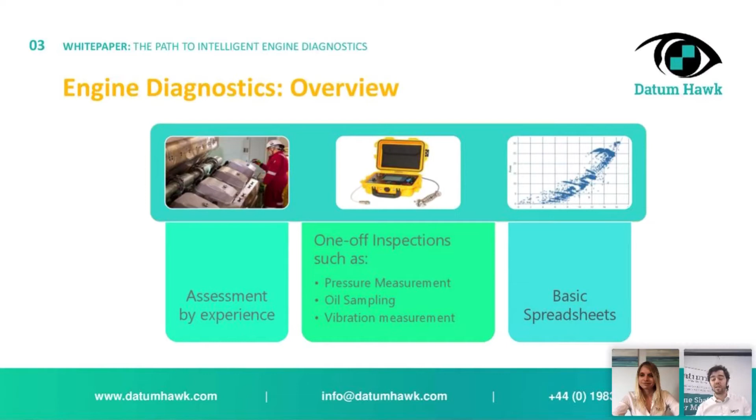And what we're looking to see here is how we can make a contribution in Datum Electronics, such that we can lessen and improve the burden that the ship owner is having on their shoulders, so they don't have to automate their decision-making procedures in terms of maintenance and diagnostics, as well as not having to worry about these things directly themselves, by bringing state-of-the-art technologies, as we're about to explain.

So, as I already started to explain, what's the need to innovate? Well, we want to first of all help implement the state-of-the-art of monitoring and diagnostics technology. And with the onset of digitalization these days, it's almost a requisite that everybody should be involved with these kinds of things, because there are massive benefits to gain.

Also, we are facing extremely volatile global markets with global fuel market uncertainty, as well as massively fluctuating profit margins, which is actually not only a recent problem, but tends to be recurrent, especially in the shipping industry. We tend to have a lot of booms and busts.

In addition, we are facing quite large costs as well. The increasing machinery complexity increases maintenance costs, and also there is costly downtime. As a matter of fact, I remember seeing a report from the Swedish P&I Club, which claims that the claims for machinery breakdown are steadily increasing over the last decade.

The last, and also a very important topic, we have to deal with compliance. So IMO has a new regulatory agenda with things such as the EEXI, which might be implemented. We have the EU Green Deal and the UK Clean Maritime Plan, and all of these will push the ship owner to run very, very efficient engines, and respectively might reduce the profit margins. So cost savings are even more essential.

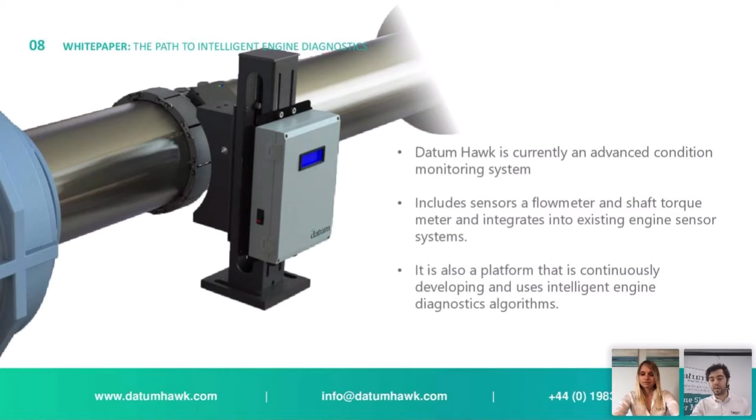But most importantly, Datum Hawk is a platform that is continuously developing and uses intelligent engine diagnostics algorithms. So we obtain data, we process them, we develop algorithms to explain the phenomena that we see and that can improve the operation of the engine, and we feed it back into the system. So that's the idea behind it.

So how does it work? In order to address this, we have to address it through a three-step process. First, we have to understand what the vital measurements are, which we're looking to collect. And in these vital measurements, of course, is the instantaneous crankshaft torque, or otherwise the engine's torque profile.

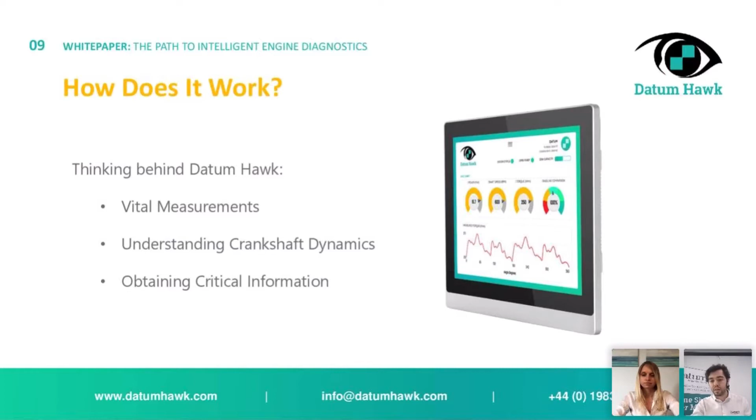Then we have to discuss how we can understand this measurement and how we can interpret the data provided by this measurement. And thirdly, we have to see how from this interpretation we can actually obtain useful information about our engine. It's going to help us. So, the vital measurements.

So as we said in the beginning, engine monitoring can be done in many ways. Primarily, we measure engine temperatures, fuel consumption, we do oil sampling, and we measure the in-cylinder pressures.

However, we have to keep in mind, when we're measuring something, it has to fulfill 4 criteria. The first one is, whatever is being measured has to be measured accurately, so we have high confidence that the value we're recording is accurate.

Secondly, it has to be measured cheaply. For example, it would be great if we had an airflow sensor in the engine after the turbocharger, so we can see what the mass airflow is, but this would be absurdly expensive.

Thirdly, this measurement has to be performed continuously. This is a very important point we're stressing throughout this presentation - for these techniques to be effective, there needs to be continuous monitoring so we can detect the onset of faults and diagnose beforehand, before they blow out of proportion and increase the cost of operation with costly downtime, etc.

And last, these measurements should be able to provide useful information about the engine. Certainly, the more we can measure, the better, but we have to narrow it down to key measurements. For example, the scavenge pressure is an extremely useful measurement, but it doesn't tell us as much as the in-cylinder pressure. So there's certainly a way to categorize things.

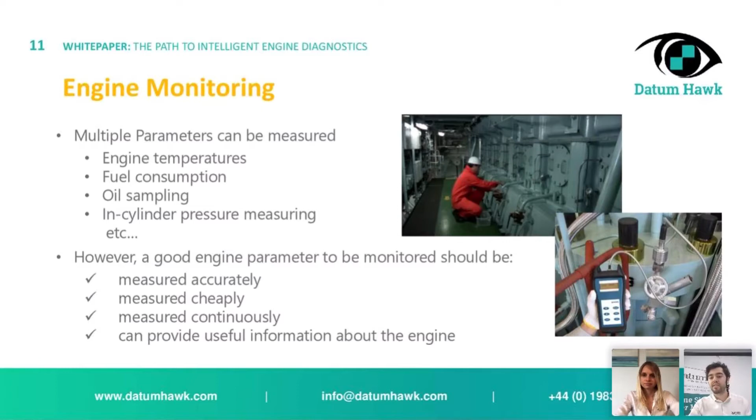For example, a condition where we have a fouled injector, or some detuned or differently tuned timing with advanced injection timing, which the engine might get if it logs more operational hours. We have a lot of experience, not just us at Datum Hawk, but also the ship owner, in interpreting in-cylinder pressure diagrams.

That's why it's so important. It can reveal differences such as differences in fuel quality, injector condition, engine tuning and degradation, as well as blow-by. These are very important things we can know about our engine.

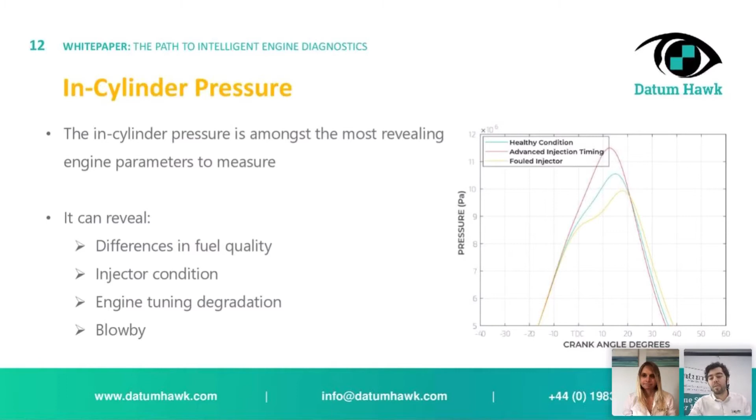However, it's very hard to perform continuous in-cylinder pressure measurements, not only because we have to deploy a network of sensors to all cylinders that have to be synchronized, but because it's a very expensive thing to do.

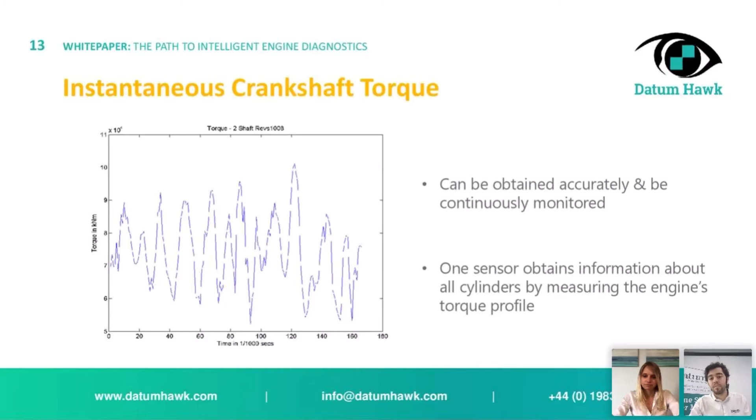But certainly, one of the very important things about the instantaneous crankshaft torque is that it can be obtained accurately, extremely accurately in our case, and be continuously monitored. Also, one sensor obtains information about all the cylinders by measuring the engine's torque profile.

So let's see how we can understand the crankshaft dynamics so we can establish a relationship between the in-cylinder pressure and the torque that we're actually measuring.

So the way to do this is to develop a crankshaft dynamics model. To interpret the information in the instantaneous crankshaft torque, its relationship with the in-cylinder pressure should be determined. For that, we need to examine the engine torque and how it's being transferred to the engine's load.

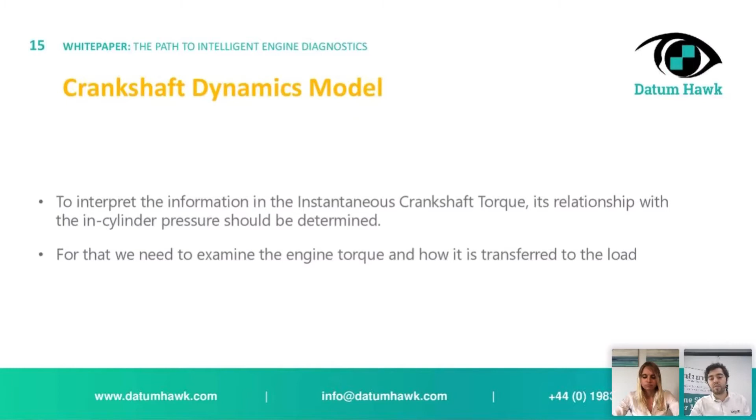So there are a few mechanisms for this happening. First of all, we have combustion torque from the combustion gases within each cylinder. Then we have torque opposing the combustion torque, which includes the friction torque on the cylinder liner, as well as all the main bearings.

Then, and most importantly, something that's not intuitive, we have crankshaft structural damping as well as flexibility torque. So we have a lot of absorption from the structural flexibility and the structural damping, as well as the crankshaft flexibility. As it flexes within all of these loads exerted on it, it actually translates the torque signal. And last, we have the engine load torque, which is what our propeller would absorb, or the generator.

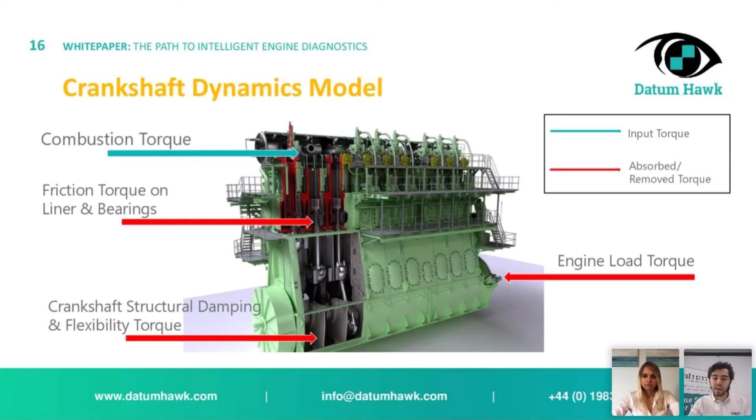So if we put all of these together and create a crankshaft dynamics model, this is what we've actually done over the past year. We've put together a crankshaft dynamics model that takes very basic inputs, for example the in-cylinder pressure for every cylinder, the basic information regarding the engine, like number of cylinders and the stroke, as well as torsional vibration analysis coefficients.

The torsional vibration analysis is a piece of paper that we get after the installation of the engine, when it's brand new on the vessel, certifying that there are no hazardous vibrations. The information contained within there is used in the crankshaft dynamics model, and this comes with all engines. With that, we're able to model and predict what the engine's torque profile will be.

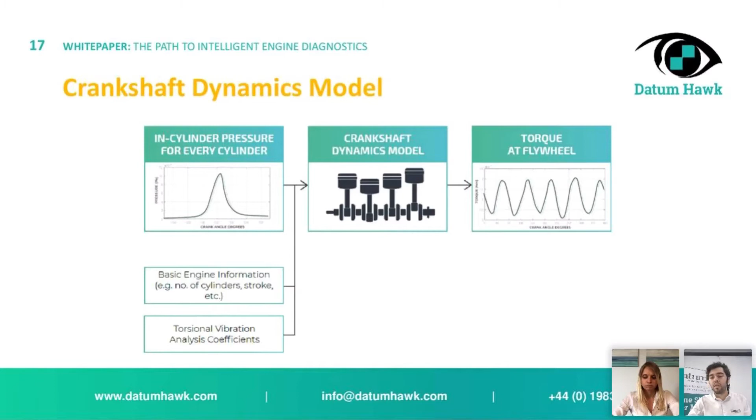So how is this actually useful? Well, first of all, we have to validate the model, and actually that's what we've done. The model was successfully tested in the case of a 10-cylinder, 2-stroke diesel engine.

As we can see here in the continuous black line, the instantaneous torque within 360 degrees is actually fluctuating quite a bit. It has an average value, which is what the engine's torque would be in what we call steady state, but instantaneously it's varying by quite a bit. We were actually surprised to see that, but the model confirmed it - this is true, this is actually what is happening instantaneously.

Another interesting fact is that the engine has 10 cylinders in this specific case, and we are able to observe 1, 2, 3, 4, 5 distinct peaks in the engine's torque profile. That tells us right there that there is a relationship between those two.

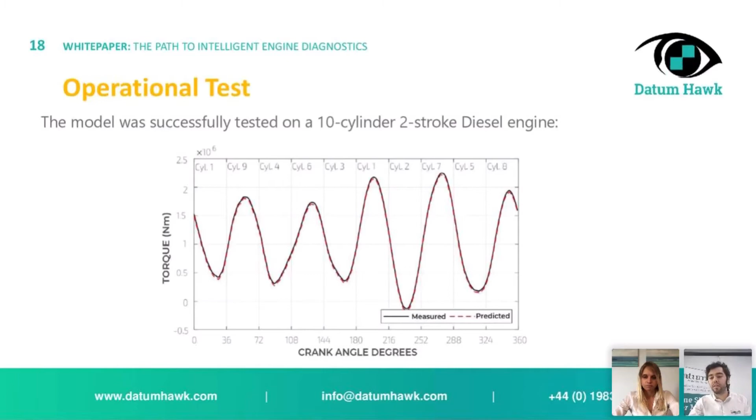So having modeled that and being able to predict the engine's instantaneous crankshaft torque, we can now start obtaining critical information and see how we can perform diagnostics.

The first thing we can do is start doing what we call failure mapping. If we have the crankshaft dynamics model and we're able to predict the torque, then we can simulate faults. For example, we know pretty well how a faulty in-cylinder pressure diagram looks like, so we can virtually introduce a fault on cylinder 1 and then see how the engine's instantaneous crankshaft torque reacts.

Then we can virtually introduce another fault, and then another, and we can do this thousands of times, as many as we like, so that we can obtain a map of many faulty conditions and their corresponding instantaneous crankshaft torque or engine profile.

We can see this in this figure. The green signal that goes up and down would be the healthy engine. Then we've got the red signal, which would be the fouled injector at cylinder number 2, a fault that we have actually simulated. We can see that there is a very subtle, but certainly measurable, difference between these two signals.

Then, just to show the other extreme, we've introduced a complete misfire at cylinder number 5, which is the yellow line that we can see is drastically different from the baseline signal. So the idea here is that we have a baseline signal, we know how our engine behaves in healthy conditions, we have data for that, and we're able to simulate any other faulty condition. Consequently, when we measure something that's out of the ordinary, we can match it to any other condition we've produced a fault for. So this is the first technique.

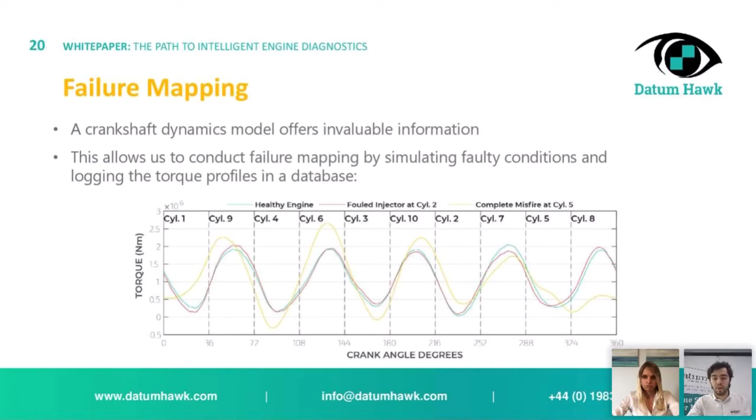Now, that's quite an important part, and that is actually a breakthrough we've had in the last month of continual development in the Datum Hawk system. Since we're able to go one way - with certain inputs in the model we're able to predict what the engine's torque profile will be, and hence try to correlate if there is any fault - we can certainly go the other way.

We've developed a model that seems to be successfully working under the conditions we've tested, using the measured torque profile to reproduce the in-cylinder pressure. That's what we see here, and that's a real test.

We see the engine torque profile on the left-hand side. It goes through the inverse crankshaft dynamics model, and we managed to get the pressures with a really good match to the measured values. As you can see, they're slightly different.

Cylinder 2 appears to have a slightly higher pressure, as well as cylinder 5. Cylinder 1 appears to have a fairly low pressure, the lowest out of all. The differences are quite small, but this is what's being expected.

So right away, what looks odd in this one is cylinders 2, 5, and 9. We can see the pressures that are slightly higher for some reason, and certainly cylinder 1 looks fairly low.

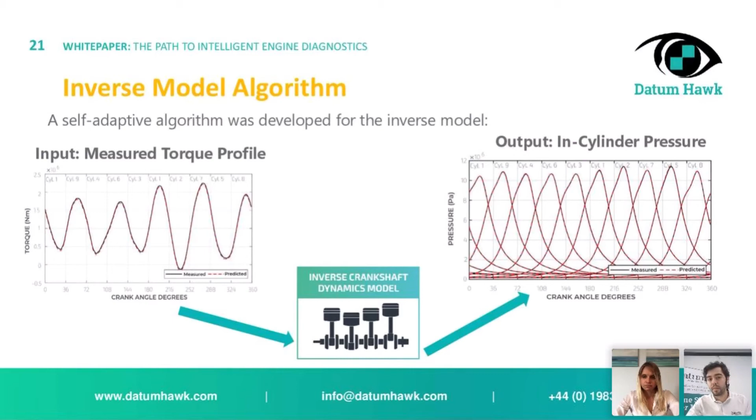So what's the conclusion? We have a lot of future plans laid out, especially after this recent breakthrough. The first is that we're looking to integrate the crankshaft dynamics model and the inverse model we just saw with an already developed thermodynamics model, as you can see here.

This thermodynamic model takes things a bit further. We don't just see the pressure curve and make assumptions and conclusions based on that. It actually pinpoints component-wise what the degradations are. That's the usefulness of the thermodynamics model.

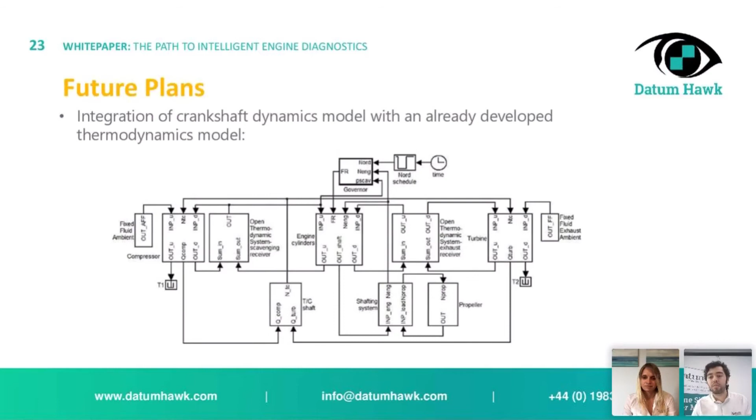Certainly, it might require a bit more measurements like scavenge pressures and certain temperatures, but these are certainly obtainable if we have a system such as Datum Hawk.

In addition, we can run a frequency analysis on the engine torque profile to determine failures which do not greatly impact the in-cylinder pressure and might not necessarily be identifiable very easily with the inverse model.

So if we were to perform this technique, we'd be able, in this engine, to see whether the exhaust gas valve is leaking.

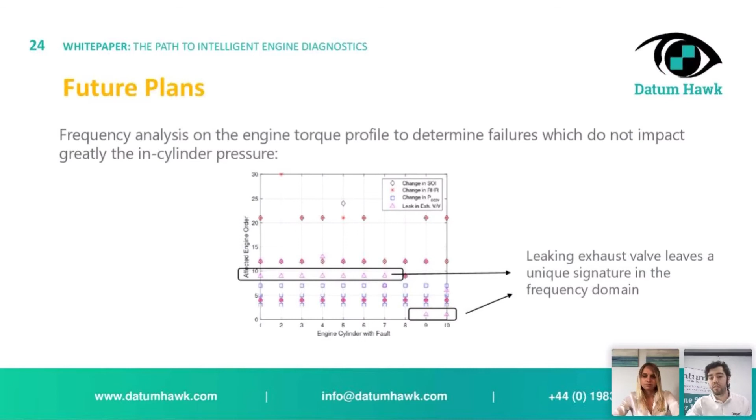In a nutshell, we're looking to improve the self-adaptive algorithm employed in the inverse dynamics model in order to address as many engines as possible, smaller, larger two-stroke engines, as well as four-stroke engines. Each one has different dynamics, but obviously that's what we're looking to do, improve the robustness so we can capture all of this.

And then we're looking to couple a crankshaft dynamics model with a thermodynamics model in order to provide component-wise degradation trends, see component-wise what's going on, and inform the ship owner with that. Last, we're looking to integrate the frequency analysis on the instantaneous crankshaft torque signal.

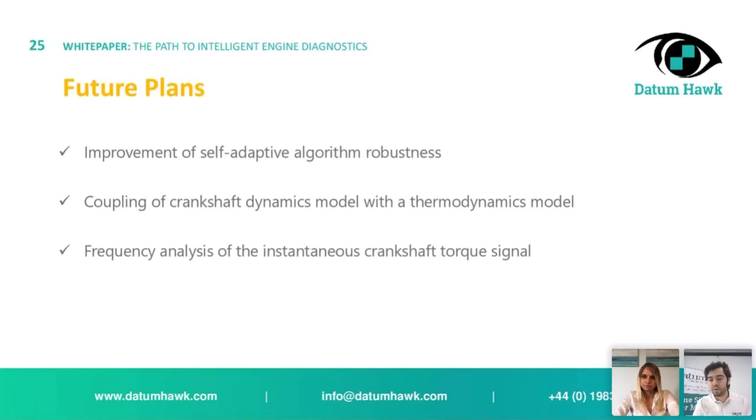So this is it in regards to what Datum Hawk is, how we use the instantaneous crankshaft torque, and pretty much what's the thinking behind it.

I'm certainly looking forward to answering any of the questions that you might have.